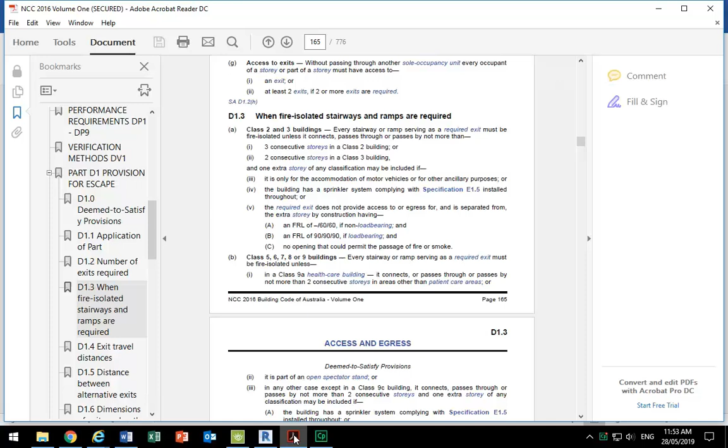So here I've just opened the BCA, and I'm sure you'd all know where you should be starting, but I'll just point out it's Volume 1, not Volume 2. That's the first thing you need to be aware of with the BCA or NCC. You can call it either, but it's probably a good habit to get into calling it the NCC rather than the BCA, even though technically both are okay, because you'll see at the bottom of every page it still does say Building Code of Australia, but it also says NCC, and technically NCC is volumes 1, 2 and 3. The Building Code of Australia is only volumes 1 and 2.

But also you get some building inspector and project manager type people who these days don't even know what you mean, or will say that you're wrong if you say BCA. It's just one of those things. So go with NCC if you've got a choice, but if you've got old documents that still say BCA, it's referring to the same thing. So then you need to make sure that it's Volume 1, because Volume 1 is for classes 2 to 9. Volume 2 is classes 1 and 10.

So both of the volumes have the class information. Class 1 is detached residential. I'm pretty sure it actually says residential or row houses. Yeah, that's right. And that's usually what I check, and I go, oh, wrong one. But it's easy. Once you know those two classes, 1 and 10, which is essentially residential and car parks or garages associated with residential, you know that if you're doing that sort of work, you look at Volume 2, otherwise everything else is Volume 1.

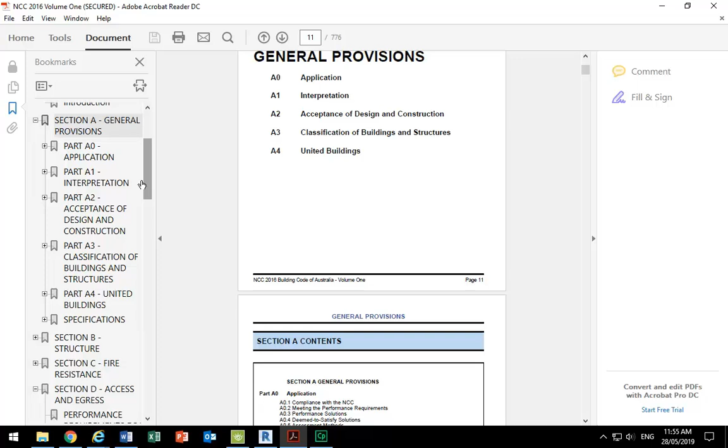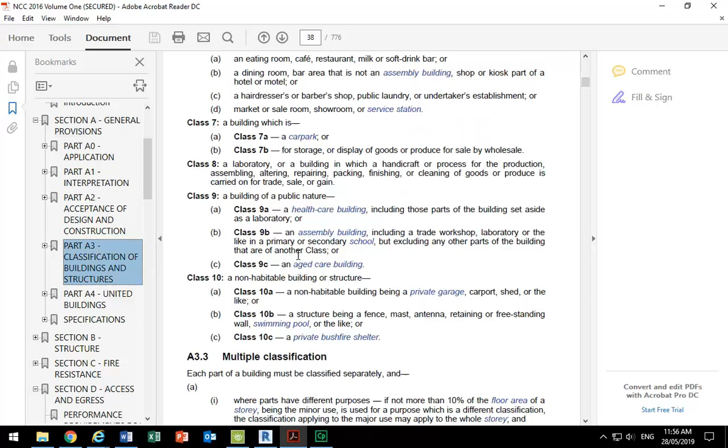Normally where you start is by confirming the classification, and it's got this section in Volumes 1 and 2. Here it's Part A3, where you've got your classes, which I'm sure you all know off by heart now anyway. But I still sometimes look it up. Class 7's car park, I do that all the time. But Class 8 is one that I don't do very often. I've done one. That's laboratories and buildings like that. And then Class 9s, you've got a few different variations. And yours can be classed as Class 9B, believe it or not. Assembly buildings. Sometimes bars are classed as that, especially if they're for public entertainment. So that's one to look out for.

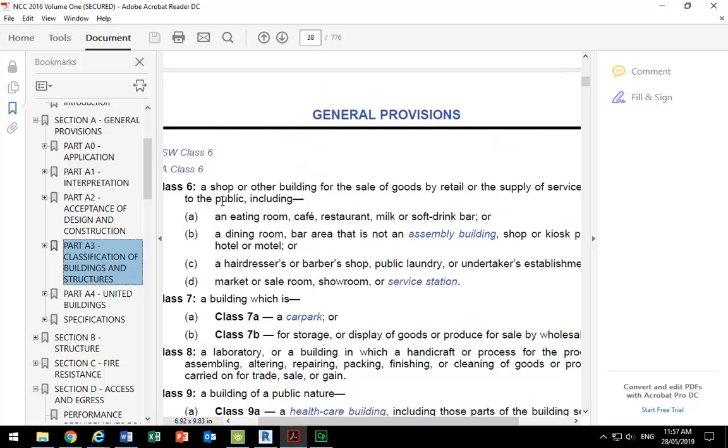Elise, does that answer your question? If it's classed as an assembly building, sometimes you can have multiple classifications. But it's probably better, just for the exercise, to keep it simple and make it Class 6, which is most retail. So that'd be multiple classifications, but is it the retail part you're looking at? Is it a public building? What's it being used for? Yeah, so probably you will have 9B. And that's important because it makes a big difference to the number of exits.

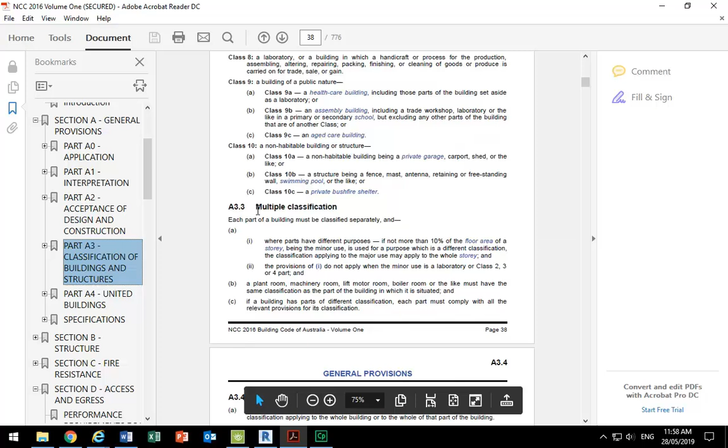You can tell most pubs, if they have entertainment, you might need to add exits, but that's easy because if it's carriage works or tram sheds, one of those sorts of buildings, it's easy to have lots of exits on street level in those big openings they've got, and you just make sure that they're not all windows; that some of them are still exits. So here, you can see again, probably most of it still will be Class 6. And you can have multiple classification as well. But we'll keep it simple and keep it as Class 6, so that answers the first question there.

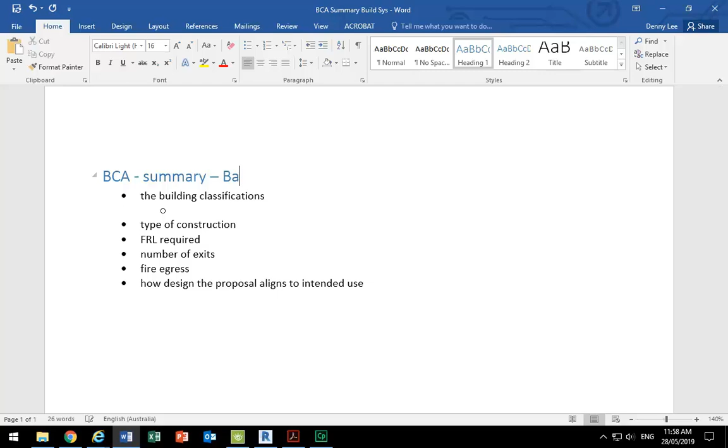Building classification, so I'm just going to put a note here: this is the building summary for Town Hall Hotel, and we're going to ignore the entertainment aspect, which would make it 9B. Oh, you're doing Barangaroo, sorry. Okay, so let's do that. That's fine. Barangaroo, so that's easier. We don't have to do this stuff, though. Oh, we don't? Okay, so we'll do Barangaroo. So that's even easier because...

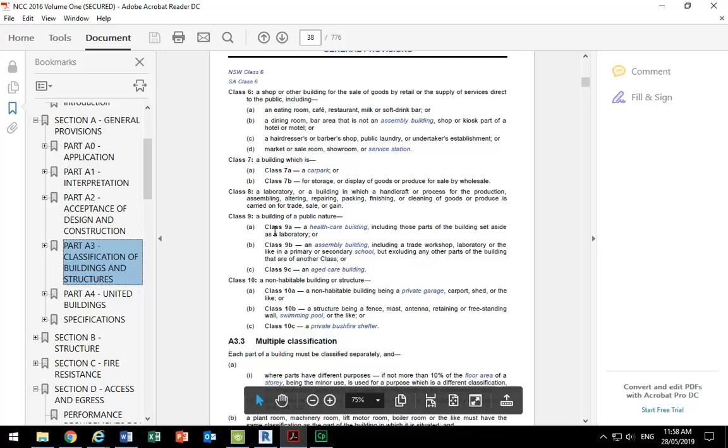Yeah, because then there's only one class. Yeah. I thought he was doing this. Yep, that's even easier. And it's still Class 6. So, much simpler. So it still could be 9B. Well, so what I'm saying, class 5, office building. You're not doing retail in Barangaroo, are you? Yeah, so class 5. Okay, so there we are.

No, but we're not doing Barangaroo. We are, we're doing Barangaroo. Yes, yes. So we've been doing the shopping part of that building on the lower levels as well, where of course it will be class 6. But yeah, so you're doing the office part, which is class 5. And then, okay, so then type of construction is the next thing.

And I'll give you a handout that, believe it or not, Kylie did. You've had Kylie, haven't you? She did a really good, 'cause I know she gets a hard time sometimes about the level of detail she does, but she did a really good rundown on the workflow, or some steps you can follow through to check all of these things. So I'll give that to you later. It's a really good PowerPoint that she did. So you'll see this process that I'm going to follow is what she's outlined there.

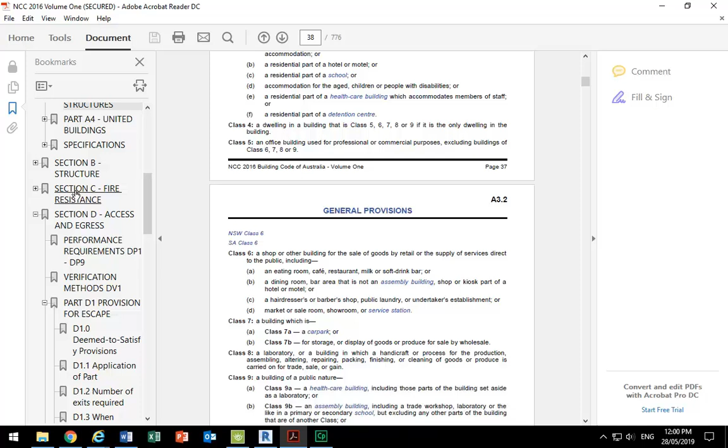So looking at the types. So do you know what this is? The type of construction? Oh, no, there's only one answer to this one in the BCA. No. It's a BCA thing. So if you've done it once, you'll know exactly what it is. So it's in here, section C, I'm pretty sure is where you find it, from memory. And if we go down there, there we are. So this is the type of construction required. It's A, B or C.

So, yes, absolutely. When it's a tall building like this, you don't really need to think too much about it because it's nearly always going to be A. Especially at this height, in fact, it would pretty much always be A. Yes, I'm recording it. So that's the most fire-resisting type of construction. And so we'll put that in. So type A. Okay, so then, this is where it gets interesting. FRL required.

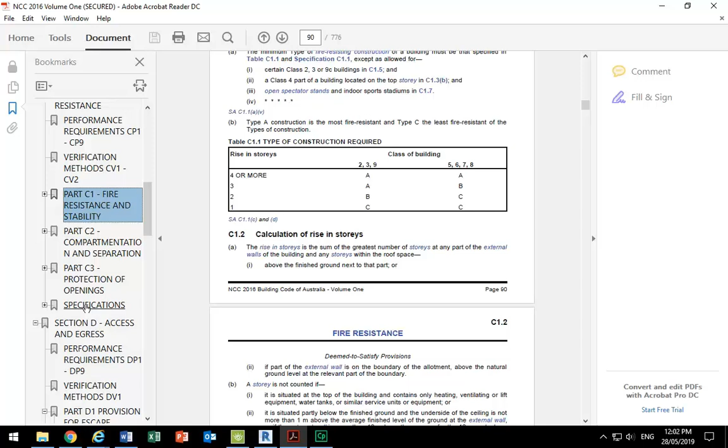And the reason it's kind of interesting, but worth spending a bit of time on, is that it's not the easiest thing to find in the BCA, especially this one, the way it's structured. And notice I'm still looking at NCC 2016, even though technically 2019 is now in force. I've got a copy of NCC 2019 you can have a look at, but we'll start using that later on. So for now, I think you can stick with 2016 and just start to look at 2019. And it is mostly the fire things that have changed in the new one. So that's partly the reason I don't want to look at it, because we'd have to do things a little bit differently. So it's in specifications, you'll then find the fire-resisting construction requirements.

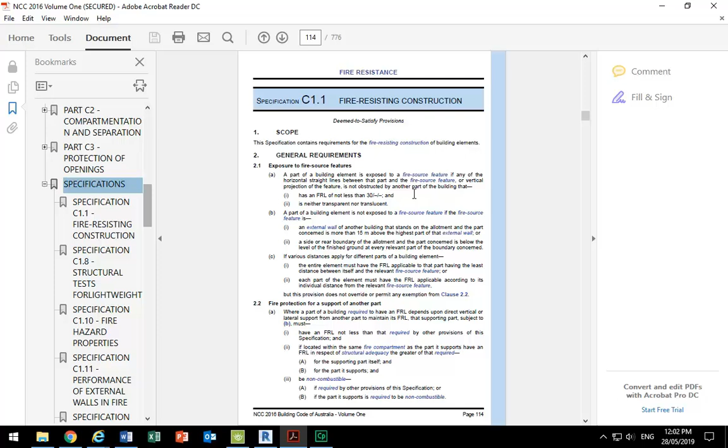And it's not categorised quite as well as the other parts are. Most of the other sections, once you're familiar with them, you can navigate through the bookmarks on the left here, and it's essentially like a table of contents. But when you get to the specifications, it's not organised quite as well. And I found it's easier just to scroll through to find the tables that have the requirements for the FRLs. And here we are. So there's the first table, which is for type A construction, and that gives you the FRLs. You need to find which of these things are relevant, and then you can just copy those across.

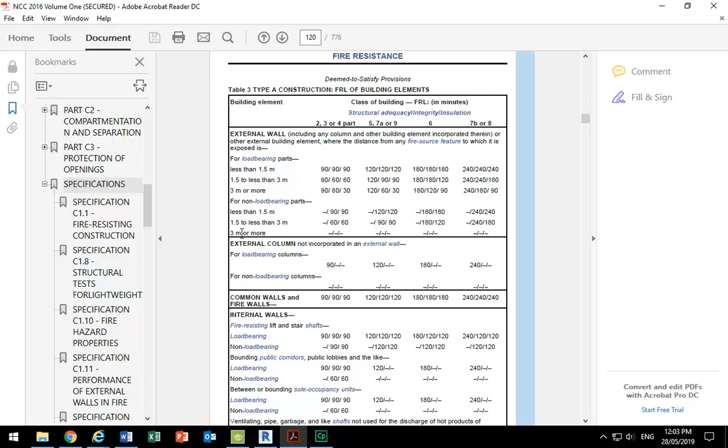So, well, yeah, you'll have, I suppose, the things you're changing. Yeah. Isn't everything pretty much 3 metres or more because the tower is not like... That's external walls, but then internal walls. Yeah, they're just external walls. So, yeah.

Yeah, but then you will have some that are bounding your fire compartments. So, sole occupancy units. You'll have a tenancy; that's the unit, but then that can be broken up into different compartments technically as well. So are all of ours non-load bearing? Not necessarily, no.

We've got columns all through. Yeah, but you're not changing anything to do with the existing structure. But you might be proposing new structural elements that would be load bearing, or even walls that go up across two stories, possibly. If it's just an internal partition, then it's not load bearing, and you could say that. So non-load bearing, you can see it basically has that first one, which is structural adequacy.

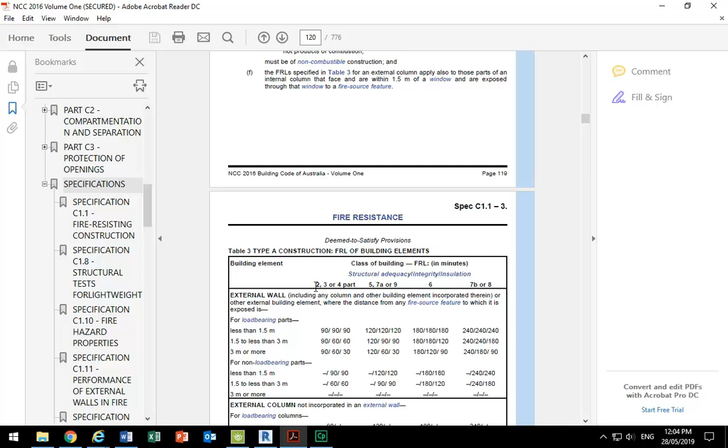I've always got to go and look this up. So you've got the voids. I don't think so. But essentially, I think you could say that it's basically going to be non-load bearing if it's an internal partition that you're putting inside that existing structure.

So what is it? Integrity, insulation, and structural. I always have to look these up. I don't memorise them for some stupid reason, but you don't really need to remember them because you just look this up in the specifications for the type of wall, which we'll get to in a second. John might know these off the top of his head.

What are the three numbers? It's structure, insulation, and integrity, or something, isn't it? It's actually written as structural adequacy, integrity, and insulation's the last one. That's it. So structural, integrity, insulation. Well, you want to have an idea, but you'll see when you look up the specifications. Their time, yeah. So FRL in minutes.

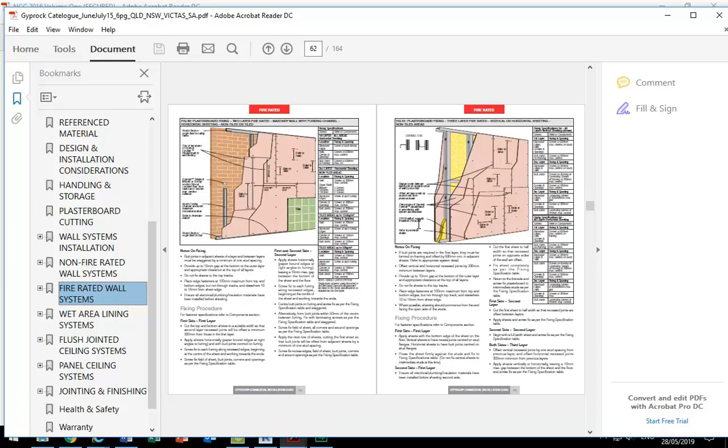And so the way you'll test to see that your walls have the right requirements is you look up a manufacturer's catalogue, essentially, and that will give you the fire rating for the sorts of walls that you're proposing. So here, the catalogue has different wall types. If we go for the fire rated wall systems, it will give you the FRLs. Have a look at these. I'm just trying to find one that gives you an FRL.

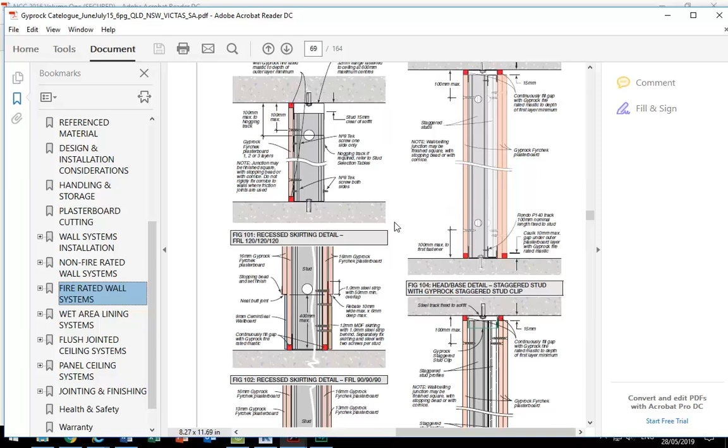And John, would you like diagrams? Yes, you want a diagram of it? Of the types of wall, on the fire rated wall? Nah, please say no. What? He said no. No, please no.

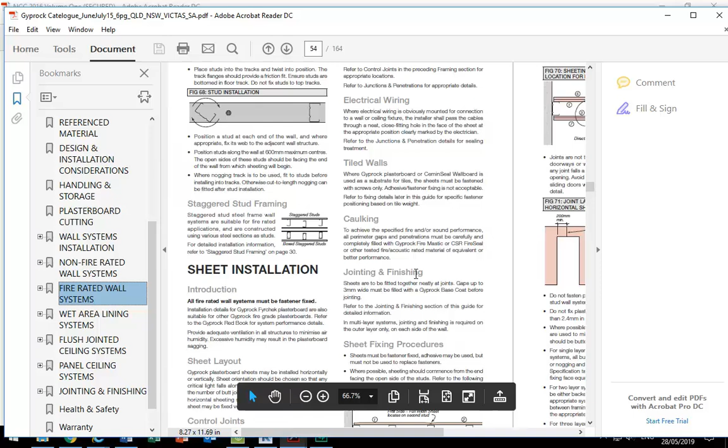Right, so for internal non-load bearing wall it's 120, 120, 120. Yeah, that's if it's... you've got to check the location of it as well. So it's between or bounding sole occupancy units. If it's purely internal, it'll have different requirements. Essentially, if they're purely internal, they're not required to be fire rated. Right, so then it's dash? Yeah, it'll often just be dash, dash, dash. So if it's purely internal, inside the unit, then it doesn't need to have a fire rating.

So why has it got... Oh, right. So non-load bearing, and even here, between or bounding units... okay. Oh, so that's in a fire resisting shaft. It's in a shaft. I can't read it up here. So essentially, for your class of building, technically, it doesn't need a fire rating.

Normally, I think even if it's not required, you would make it fire rated if it's bounding the unit. That would just be common sense. Even though it says here dash, dash, dash, I think that'd be common practice. And definitely if it's around any sort of fire stair, it's absolutely required. So you're suggesting 120, 120, 120 instead of that? Well, at least 120. But the core is around the fire stairs, so we don't need to touch it. Yeah, we're not doing anything to the fire stairs.

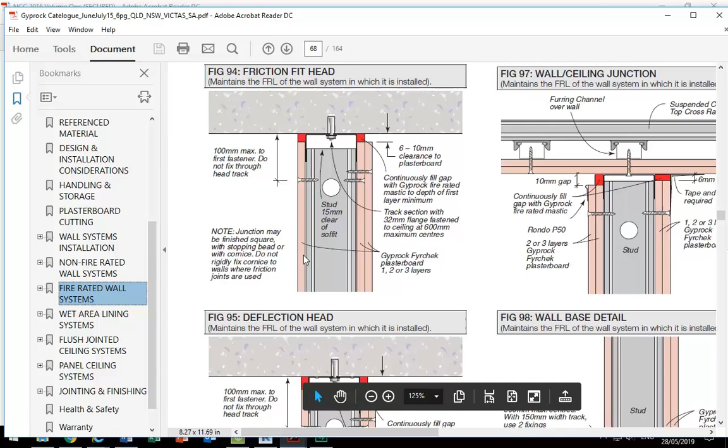I don't think I'll go through the Gyprock catalogue anymore, but you will definitely find the fire rating FRLs for fire rated walls in this catalogue. I just can't see them at the moment, but they are in here. This is a fairly common wall that will give you a certain fire rating, but I'll have to look up where you see the FRLs. I'm surprised I don't give them to you here.

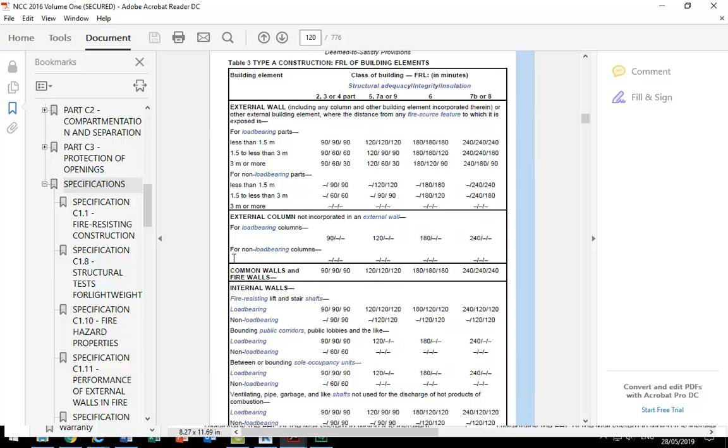So C3.15, that's what we're looking at, I'm pretty sure. Let me go back a bit. Oh, 3.1, that's right, and then 3.15 is the table we're looking at.

Anyhow, this tells you the requirement. The Gyprock catalogue, I thought did list the actual FRL values of these sorts of walls somewhere - I just can't see it right now. But again, that's a fairly standard sort of wall. So Fyrchek is the type of plasterboard that Gyprock make that gives you a fire rating, and sometimes you might need a couple of sheets.

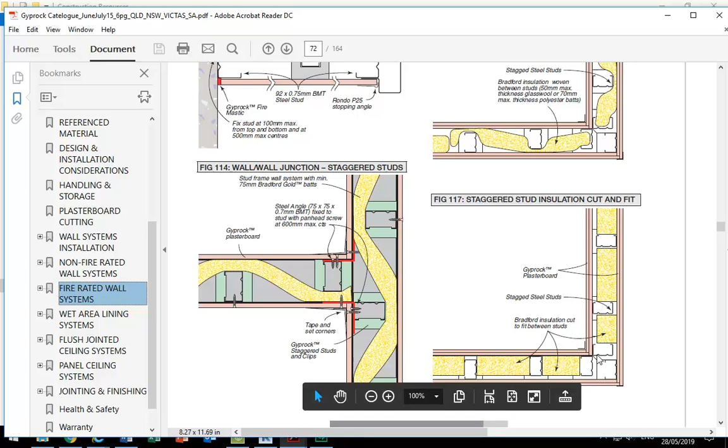Don't know why it's not listing the actual FRL values, but anyhow, you can essentially just say it would have Fyrchek each side normally. I think it has a table where they used all of... yeah, so anyhow, go through the catalogues. Oh, here we are, there it is. So it's telling you here when you put a copper penetration, it has that rating, and there's a table maybe at the beginning somewhere - you've got to go through the whole thing and you'll see it's in there.

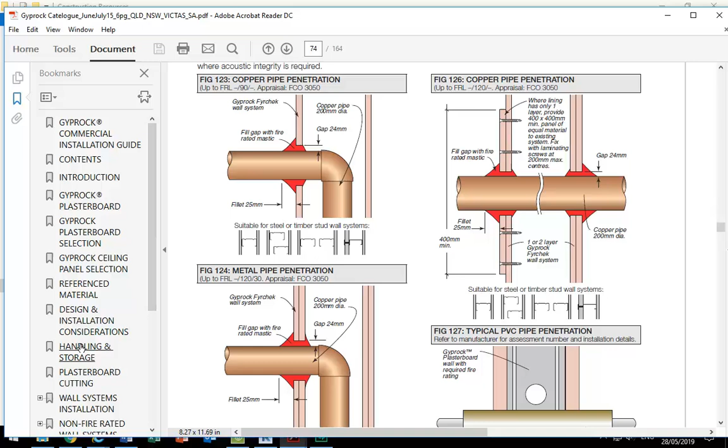Okay, so then going back to, yes, FR required - so I'll say BCA specification 3.15, C3.15, 3.15, and manufacturer's specification.

So Boral have their own specification for their plasterboard and other wall types. Brick walls, you can also look up the fire rating for if you're going to do any different materials and not just plasterboard. And glass is quite hard to fire rate - if you've got glazed partitions, it's quite hard to have them with a fire rating.

But you can. And then also the other thing to realise is that technically you don't need to have a fire rating - I know I've actually done offices where we had frosted glass partitions between tenancies that worked pretty well, but we had to really make sure the fire rating wasn't required.

And I even saw one in, what was it? Oh, Suits, that's right, because I really like the offices in that show, and they did the same thing. So I thought, yep, I was on the right track there.

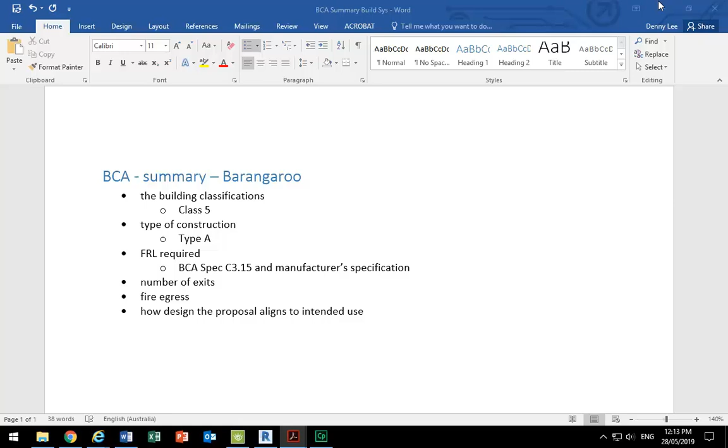So, okay, number of exits - this is where it gets a bit more interesting. Number of exits, that's all section D. This has been section C, and section C is quite technical - if you're not a fire engineer, it can be a difficult thing to read through.

It is, yeah, but it's still not as bad as section B - section B is for structural engineers. You still need a little bit of familiarity with it, but you wouldn't be looking at that all the time. Definitely section C, you need to at least be able to look up the fire rating or the FRLs, but section D is one you really need to be familiar with. So for interior design, section D and probably section F are the two most important sections.

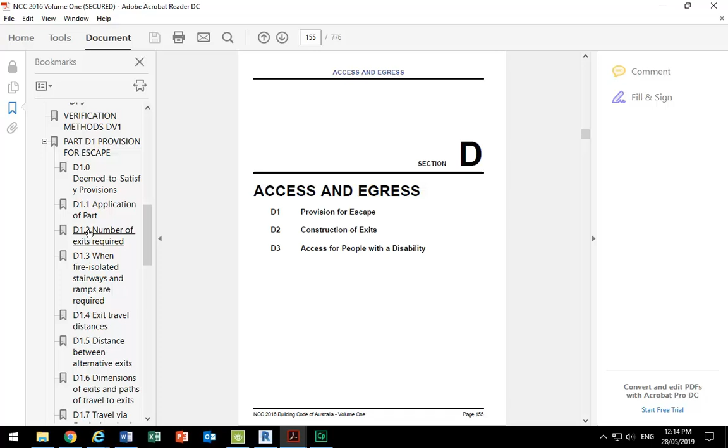So with section D, you basically need to go through the whole thing from beginning to end, but it's much easier to understand, and it's logical. So you start there, number of exits, and you can just base that on the... yep, that's it, 1.2, and then the building classification tells you which clause to look at. So we're 2 to 8, and it's fairly simple.

In addition to any horizontal exits - horizontal exits are basically to the street or outdoor space. Otherwise, it's 2 exits from each story, particularly if it's more than 25 metres, which of course it is, and don't worry about the other thing, that's for class 2 or 3.

With the Town Hall you've got that street level exit at the back of the basement. Technically it's not even really a basement, even though for some things it would be, because there's a thing about how much of the building's under the ground for the calculation of the number of stories. That's counted as a different type of exit to these vertical exits, which are the ones you need to have where you've got the fire stairs.

Is the effective height calculated from the bottom of the first floor? There's a clause about that - you look that up. There's a way of calculating the height, and it's all to do with what's below ground, how much of the building's below ground, and whether you count the story or not, and where you measure the height from. You can look up that clause, but for the Barangaroo, you're well over 25 metres. Whereas Town Hall, you're well under.

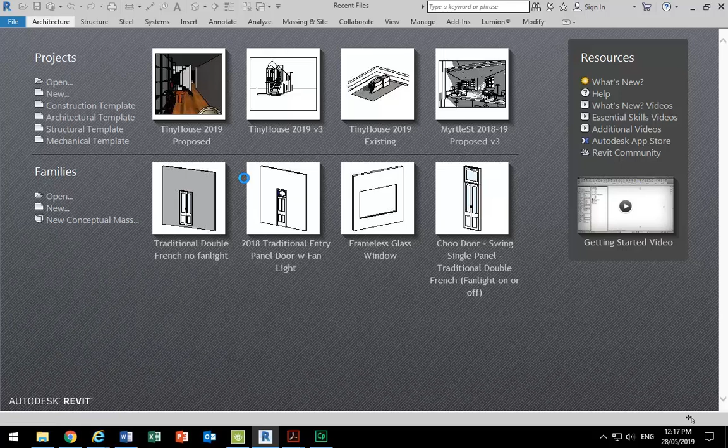It won't affect us much. We haven't touched anything near where... pretty much, yeah. So no one can change the corridor because we can't change that bit.

Yeah, exactly. So okay, if you start to measure some of the distances, using the measure tool, I'm just going to measure from here to - so the fire stairs, are they in this area? I don't even know, really. The fire stairs, I think, behind... are they up here? Where's the fire stairs? Anyone remember? No, I don't know, they never marked them in. They must be in that central bit.

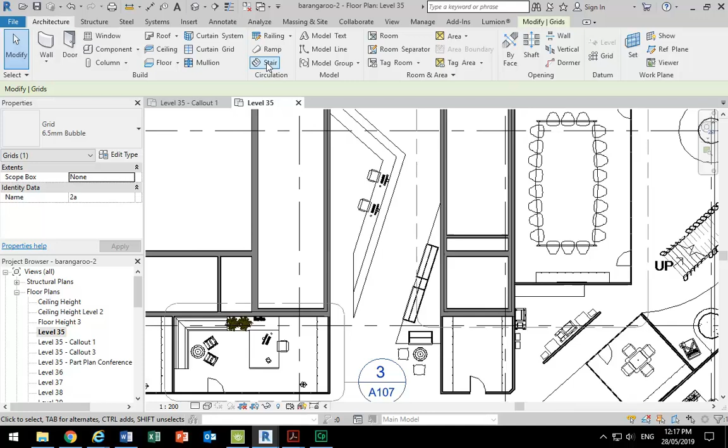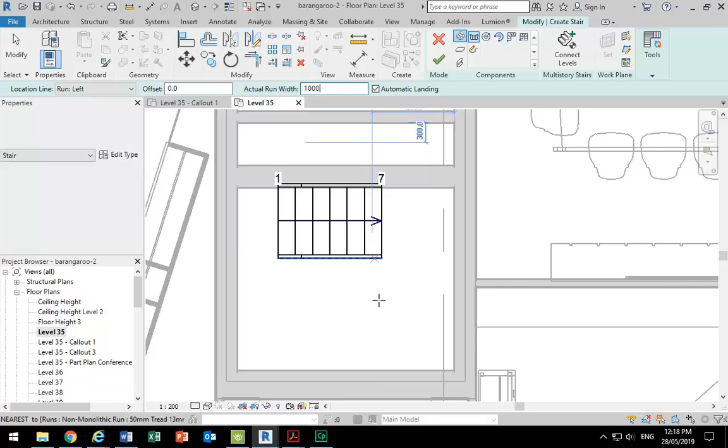All right, so... that'll do. Oh, they're going to this one section there. So, oh yeah, it's just so I know where they are. He's just calculating the distance from there to the furthest point. Yeah, exactly. So I've got a stair there, and then where was the other one? Left next to the toilet, underneath that number 1. Yeah, okay. So, up here. There. Okay, great.

Okay, so then we can do some rough measurements just to get an idea of the travel distances. With the measure tool, with the chain option turned on, you can just say, right, so this might be one of the furthest points from the fire stair. So from there - technically we should be going around the furniture, so I'll just try and measure a path that goes... yeah, it should be, yeah, especially when you've got workstations, they're actually fixed in location anyway. Pretty much, yeah, the workstations, you've got to set them out. So that's, at the moment, that's - let's see if I finish it.

Yeah, it was, yeah, a bit under 60, yep, yep.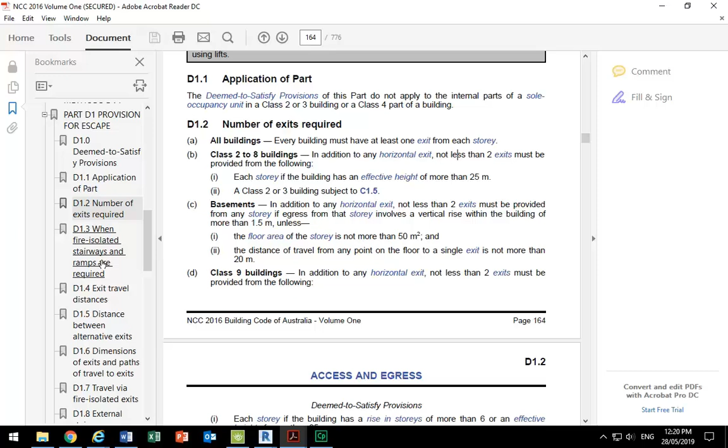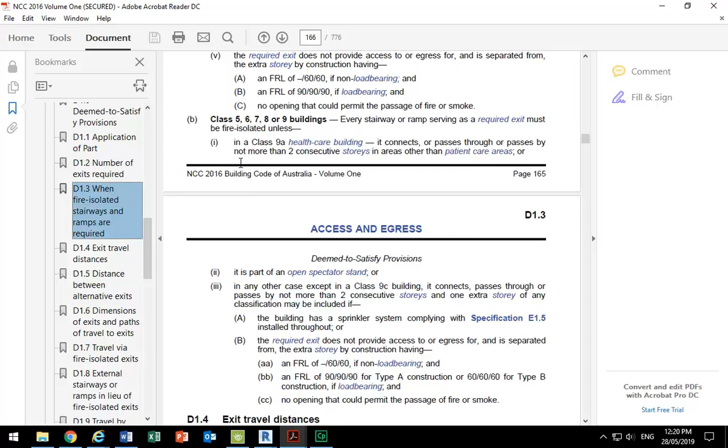And then, okay, so when fire isolated stairs are required, that's D1.3, and essentially if it's this sort of building, class 5, it's always required. So these exceptions are all for class 9, you'll see. And these days, in the past I think it didn't have to be like this, but now pretty much every stair needs to be fire isolated.

So that means it's got to be in a fire resisting shaft. And as John was saying, you may need a fire resisting corridor that forms part of that required exit. What's the wording for that? Fire resisting shaft. Yeah.

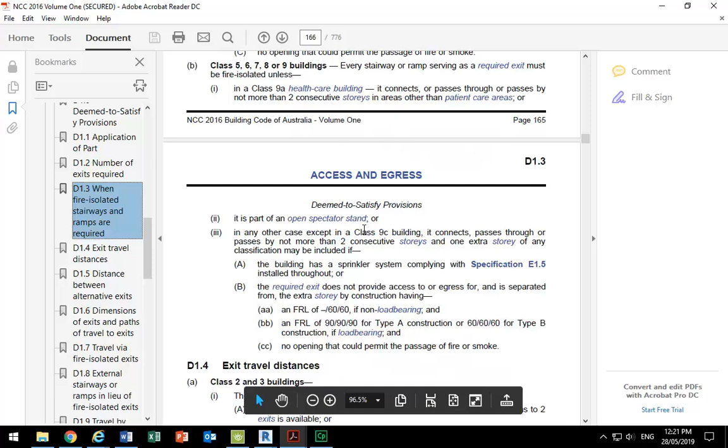So then you move on, we know they've all got to be fire resisting, and then we move on to the travel distances. Remember, these are required exits. Your access stairs are additional. So if you've got internal access stairs, they're additional to the required exits. That makes sense? Yeah, so they're not required exits.

So they're internal access stairs, and there's a little thing that can catch you out with those as well, which is kind of related to this. They can only go a certain number of stories. You can only go, I think it's about 3 or 4 stories, before you need to offset them and have them going from another point.

Yeah, it's because of fire travelling within a compartment. So fire stairs can go all the way through because they're in a shaft, but internal access stairs can't because they don't have a shaft that's fire resisting. It's so that if it starts burning, you wouldn't be able to use all the stairs, and also the fire can't travel through. So if you've got an internal access stair that goes 8 stories, the fire can go all the way through your fire compartment, which you don't want, or through multiple compartments.

Yeah, and something to watch out for. It affects atriums and lots of things. Yeah, I think it's 3 stories. You have to look it up, but it's 3 or 4 stories.

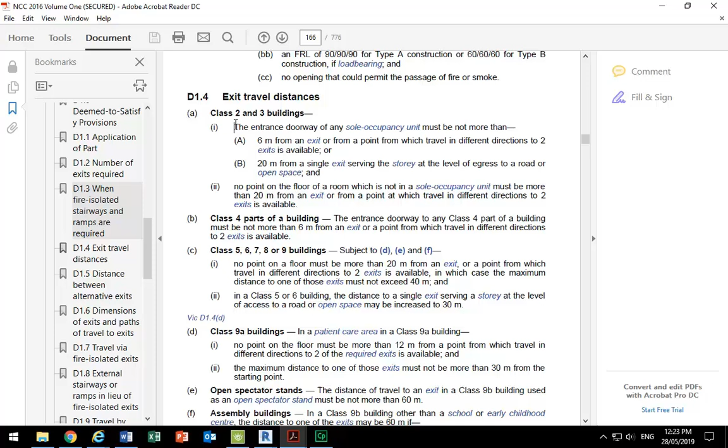So you need... that's 2 and 3, we're not doing that. We're doing 5 to 9. So this is the control that applies.

No point on the floor must be more than 20 metres from an exit, or a point where travel in 2 different directions to 2 exits is available, in which case the maximum distance to one of those exits must not exceed 40 metres. If it's only got 1 exit, which doesn't apply to us anyway, you can increase that distance to 30 metres, but that's also on the level of the access, so that doesn't apply.

So to open space - and open space has a definition you've got to be careful of - but again that doesn't really apply if you're only looking at this upper story. So it's really that first one, it's only that.

So again, 20 metres to an exit or 40 metres to a point where travel in different directions to two exits is available. And I'd be struggling to see how this one does comply unless the door's here. Let's see, so they probably have ignored the furniture, which is an option but not best practice. Measuring directly there, yeah, they're fine. So they could get around the furniture, and that's 30 metres to there.

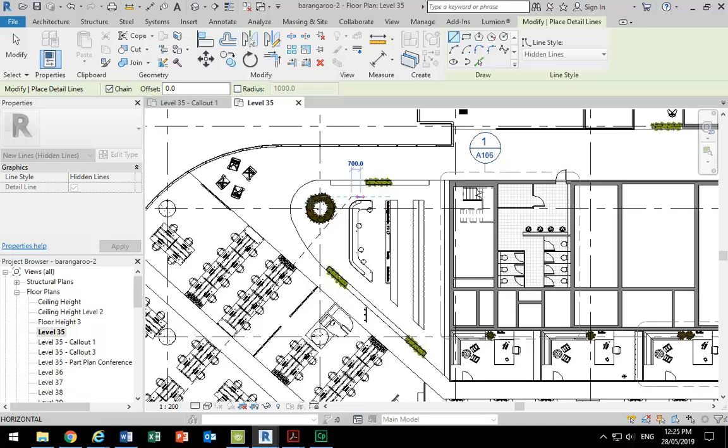So you're saying you can measure your line. Yeah, yeah, so there, that's probably okay as a path. I could maybe just adjust it slightly.

And this is something you use a lot when you're doing your planning. You'll often have to adjust things. And once again, if it doesn't comply, you just have to say it doesn't comply. Well, you should be making it comply. No, but we've already designed it. So if it didn't comply from this report, we just say it doesn't comply. I suppose so. Yeah, that's it.

And so the nice thing about these detail lines is that they give you the length in the properties. So you can see there, this one's 18 metres, the next one is 7 metres, and the next one is, let's say, 8 metres. Can't you select them all and get them added together? I don't think so. You can schedule that and do it that way.

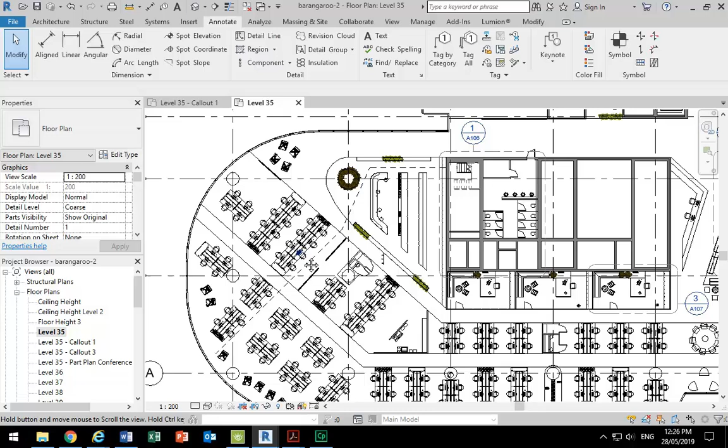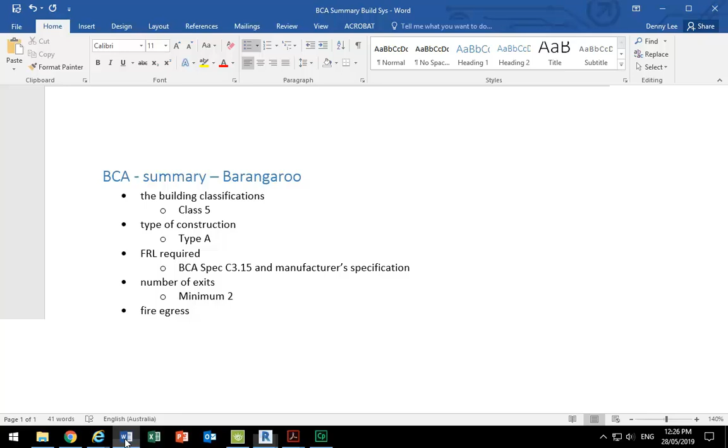So fire egress. Again, the most important thing is that you put in the requirement, and you could probably just copy that clause from the BCA, because that applies exactly.

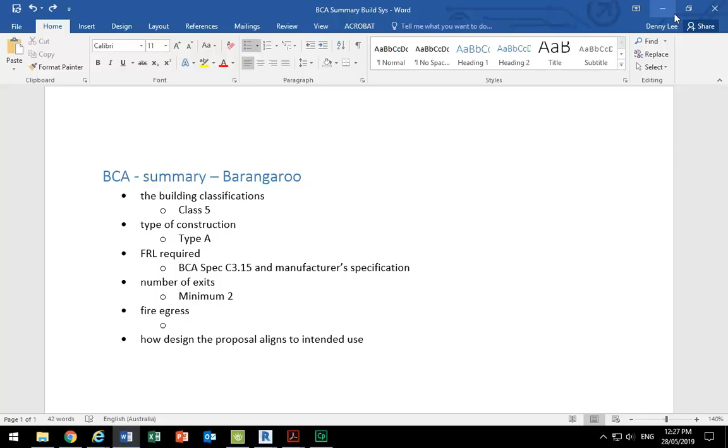Oops, didn't I just copy text? Let's do that again. Okay, it's getting some weird characters. That's better. Oh, it's getting confused. Copy. Okay, it doesn't want to copy from the BCA. I don't want to sit down and type that up. That's really frustrating. That clause could just be copied across if I can get it. Clause C1. Oh, here we go. Now it wants to do it. There we go. That's wicked.

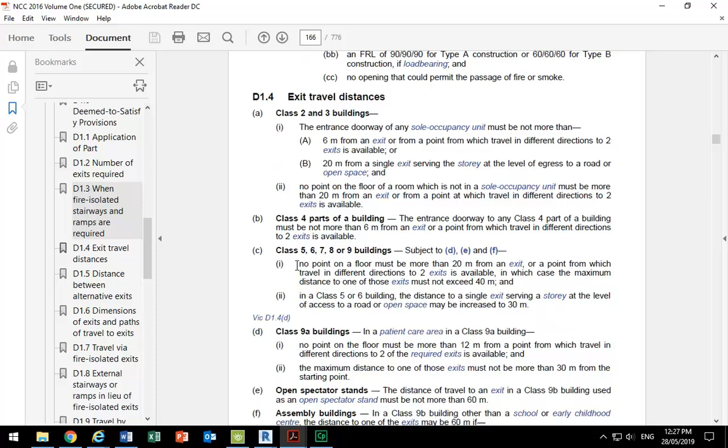And that's fire egress, yeah? That's the first part. So we've got to check those and see what other things apply. That's definitely the most important thing, exit travel distances, and that clause is probably the most important. But then you've got to go through and check the other things and make sure they comply. So the distance between exits matters, because here that's the control we're using. We have more than one exit, and we're looking at that 40 metre requirement.

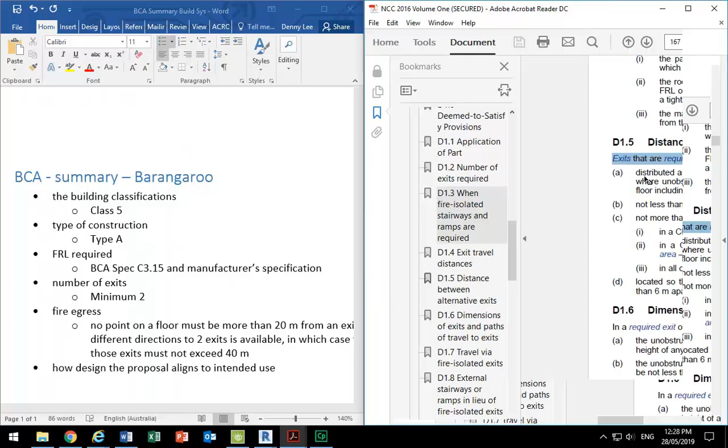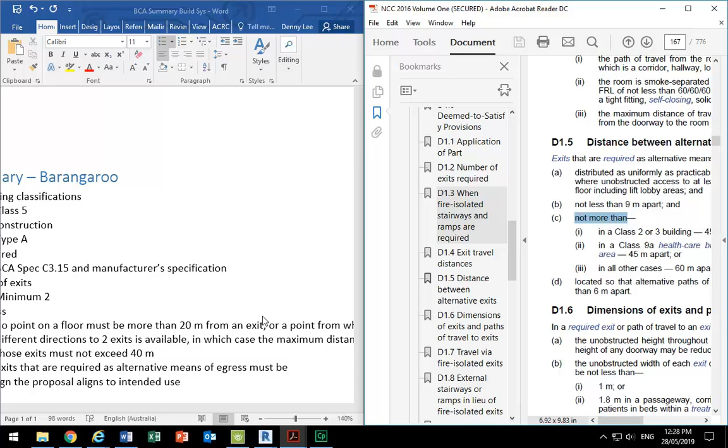So then, again, for you, it's not class 2 or 3, it's not class 9, so it's this one. 60 metres apart. There's nothing wrong sometimes with just copying the wording from here and making it make sense. You don't want to just copy whole blocks of text and not make it meaningful. So that's going to make sense if we just say exits are required, must be not more than 60 metres apart.

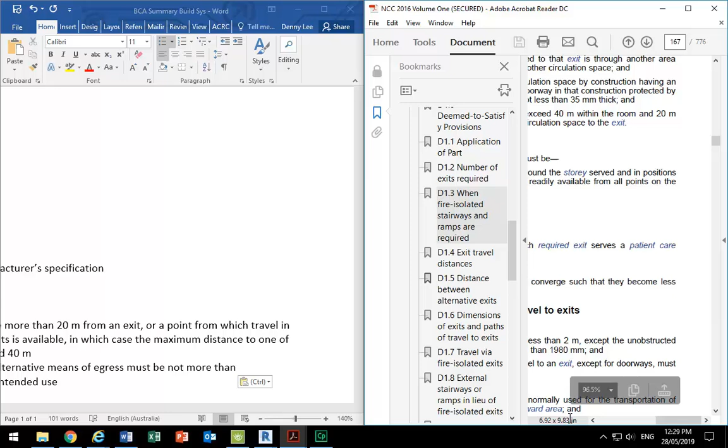There is also a requirement for when they're too close together. Oh, yes, here we go, that's just below that. So we'll get back to that. And it's all pretty logical stuff, really. You don't want them too far apart, of course, but also you don't want them too close together. That kind of defeats the purpose of having different exits.

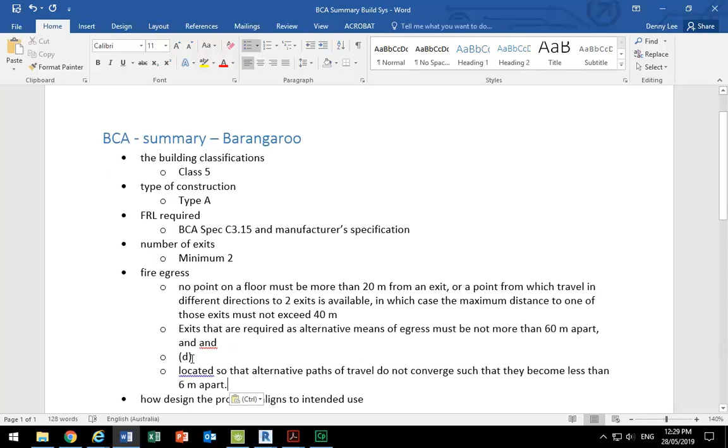So you put an and. And then an extra and. There we go. Okay, so again, just say exactly what the requirements are. Got to keep going through that whole section pretty much. And you'll learn things about how to design buildings like this by reading this section.

I'm amazed by people I've worked with, even some pretty senior architects, who have obviously never read through this whole section and don't understand basic things like how external stairways need to work. But all the good architects I've worked with have read through this multiple times and are across it all. And don't do what the bad ones did, who tried to get some external stairs built that wouldn't comply.

Or actually the worst one, she put a huge window, a 10-storey window, in a fire stair. And it tells you pretty clearly here that's not allowed. But it took the builders checking it all and doing the pricing to tell everyone that was not okay.

Anyway, so you can do fire-rated glass blocks. Yeah, fire-rated glass is a bit trickier, and also there are requirements for openings in a fire stair. Oh, yeah, not opening windows. Yeah, well, even fixed windows. There are requirements for openings, how far they can be from other openings and things like that.

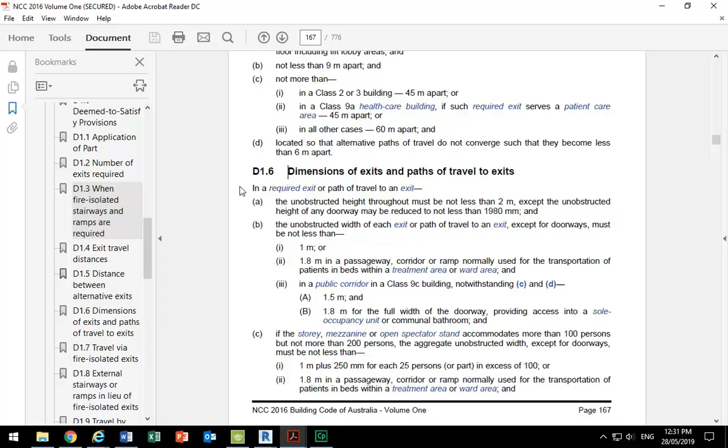And also it gets you thinking about the things that aren't made clear in here, like accessible egress, because we can't say disabled anymore, even though they do still say disabled. So people in wheelchairs generally, and I know plenty of guys in wheelchairs, and they're quite happy to say it's disabled. The requirements in here aren't all that clear, but you should allow room for them to be safe in the fire-resisting shaft as well.

Yes. And John's been through that. We just have to park them in the... Yeah, there has to be space to park them in the shaft. That's it, exactly. So this probably wouldn't be big enough, but you could check that. So again, you just need to say in the report what the requirements are.

So the other thing, though, is the width. Generally, it's a metre, except for the doorways, of course. The doorways have their own requirement. But otherwise, it's a metre. And it doesn't say it here, but I know it's a metre between handrails throughout the whole path of the exit. And so that's really important. So both A and B are applicable?

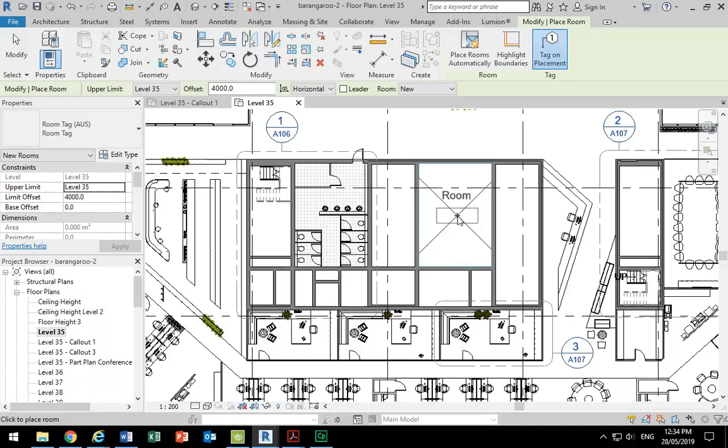The reason I don't like using rooms is because they automatically calculate rooms. You can put your own dividers and things like that in, but it's a lot of extra work. So you can get a room here, and then you can put the option into the tag to show the area, which is there. And you think, great, it's telling me the area, why don't I just use that for everything? Well, the problem is, it's calculating where the edge of the room is, based on these rules that you've got to set up.

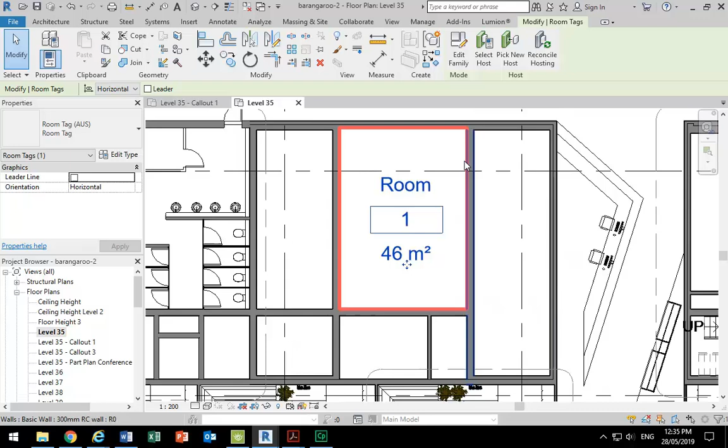And when you're looking at things like the accommodation of a level, and also even just calculating things like floor space and then lettable area, you want to set the boundaries of those spaces yourself. So you want to be able to draw where the area's edges are without letting Revit decide. Can you show us how that works?

So yeah, sure. So with the area tool, it's my favourite thing for my own designs, because you'll always have to give floor space ratios and other areas as well whenever you submit an application. So areas are really important, and then for this as well, fire egress. So when you go to click on the area option, you have to make an area plan. Then you choose the level, so I'm on level 35, so I'll choose that level.

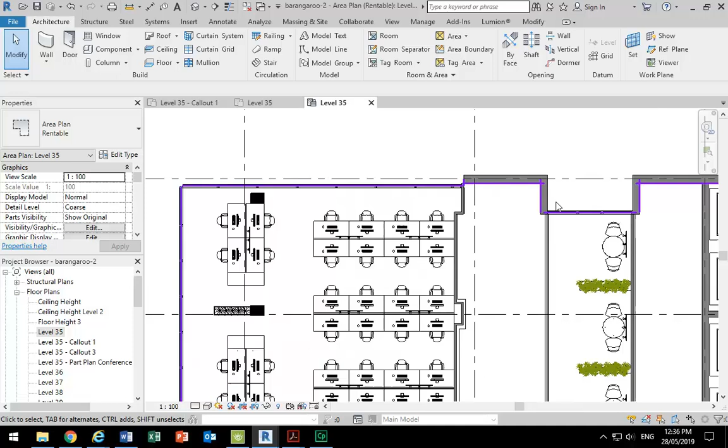And you get the option to automatically create boundary lines. It's hit and miss. Sometimes it works, sometimes it doesn't. So I'll say yes, and we'll see what it does. If it doesn't, you can say no, and then just draw the boundaries yourself. But here, it's done a pretty good job. So you can see there, it's traced around the whole outside. We at least had curtain walls, so that's... Oh, no, well, the outer edge is all it will do for you, and then the rest you've got to do yourself. So then you've got this area boundary option.

But firstly, I want to show you, it's made a new kind of view. Now, I left it on rentable, and that's okay. But the other option is gross building. So that's great, because it means it doesn't mess up the original floor plan. It doesn't affect it at all. So if we go down here and look at area plans, it then has all the options there to show areas and to then even have some nice graphics and things.

So, can you take things out within that aren't? Oh yeah, you can hide them. You don't want to delete them because that deletes it from the other one. But you can definitely hide. And that you can exclude certain things from the area? Oh yes, of course. So maybe we don't want to see furniture. So I'll just hide those. Oh no, I don't mean that. I mean exclude it from the... Oh yes, of course. Oh yeah, I'm going to show you that.

Yeah, absolutely. So I'll hide the furniture just so it doesn't get in the way, and then this as well. The lighting, we definitely don't need that. So that's a bit cleaner. Even the grids maybe are going to get in the way. Yeah, much cleaner. Okay, so then to draw in boundaries, you can just use that area boundary tool under area. So notice how until you make an area plan, it doesn't give you the option to make an area. I'll make an area in a second, but you can only make these things on an area plan.

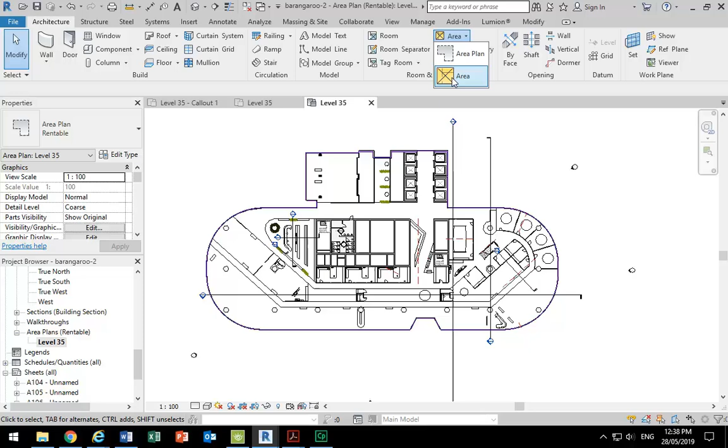So the other thing is area boundaries, and so maybe I'll just go around, and notice it's got this option, apply area rules. Often I'll just turn that off, so then I can just draw where I want. Otherwise it'll try and make the line go inside the wall following these rules that are set up. But if I turn that off, I can just draw anywhere. So I'll draw over this core. We're going to say we'll exclude that from our accommodation calculations. And here as well.

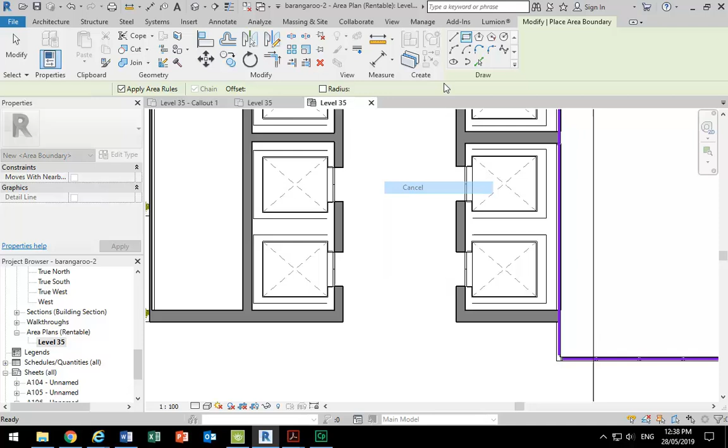Exactly. And even the bathrooms can be excluded. So, yeah, so that's... sorry? Yeah, lifts too. That's right. So I'm just going to draw some lines. And it's nicer than lots of the other things in Revit where you've got to join the lines perfectly to make closed shapes; here you can see they're not quite touching, but it'll still work.

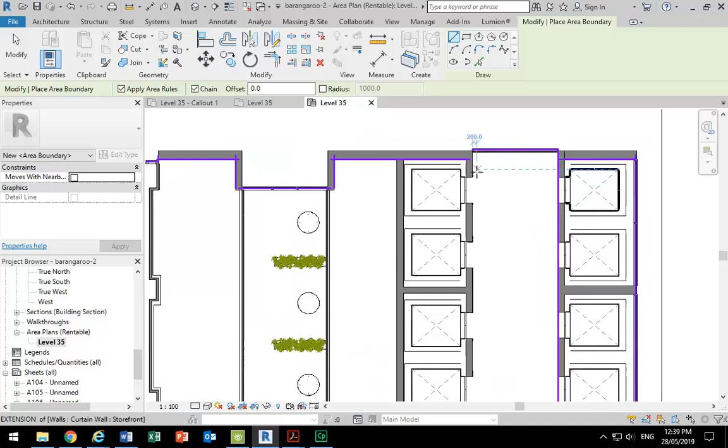So it's a really nice tool in Revit, and one that's probably underused. But people who use it for a living use it all the time, because you have to do floor space calculations and site area calculations and all these other things for every project, and that's why they've got the tool there. And yeah, the people who use rooms, you know they're students.

So then, I've got enough there to then start doing some areas. And so under the area option, you can choose area. I'm just going to click and notice how it's going with that cross there and showing you where it's stopping. So where I've drawn the boundaries, that's where it stops. So I'll just place it down there. And that gives me basically the whole level that I want. I'll show you in a second how you can divide this up into different areas.

But then to see this a bit better, I'm going to put on a colour scheme. So on the Annotate tab, you've got Colour Fill Legend. And let's put this to the side. And I'll just leave the defaults, and it's going to then fill that in, and it makes it much clearer then where the area is that I'm using.

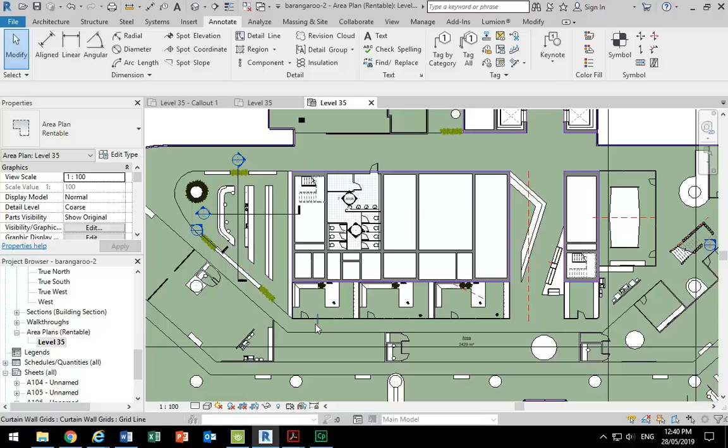And we can break that up further. So if we want to have these, just an example, these meeting rooms broken up. So we'll draw an area boundary around those. And again, they don't need to be perfectly closed or any of that stuff you've got to do with the 3D things. So now they're excluded. And I can even break them up into different spaces just by drawing a boundary between them.

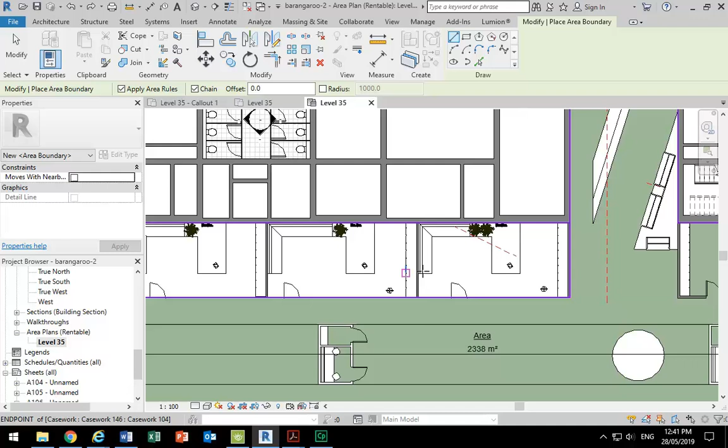Yeah, absolutely. In fact, I won't divide them. I'm going to leave them as one big space since they're next to each other. Yeah, this is great for interiors, this whole area tool with colour schemes. And so I'll go back and put a new area in just for the meeting rooms. So at the moment they're the same type. They're both called area.

Well, I'll start just by changing one of the names. So I'm going to select one of these areas, and we'll call that meeting rooms. And then we'll call the other one just office. Okay, so at the moment they're the same colour. So then we can select the legend and go to Edit Scheme. Change that colour option to name. I'm just going to say OK.

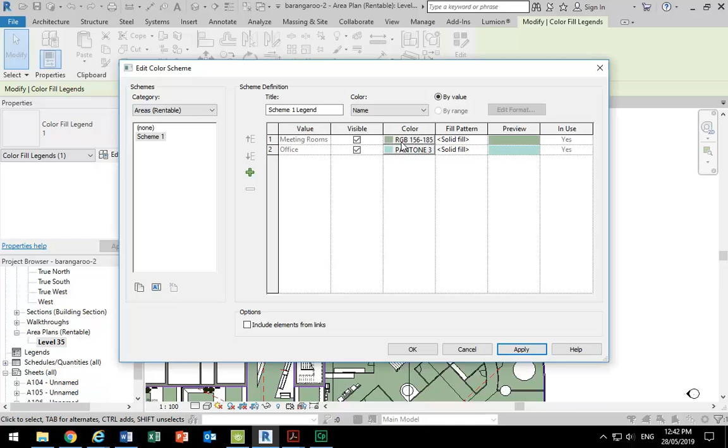And then I'm leaving it on the automatic colours, so it uses the Pantone colours. You can change them, and you've got the full Pantone library in there for some nice colours. Yeah, Pantone is a great colour system. And there we are. So, two different colours, and they correspond to what's in the legend.

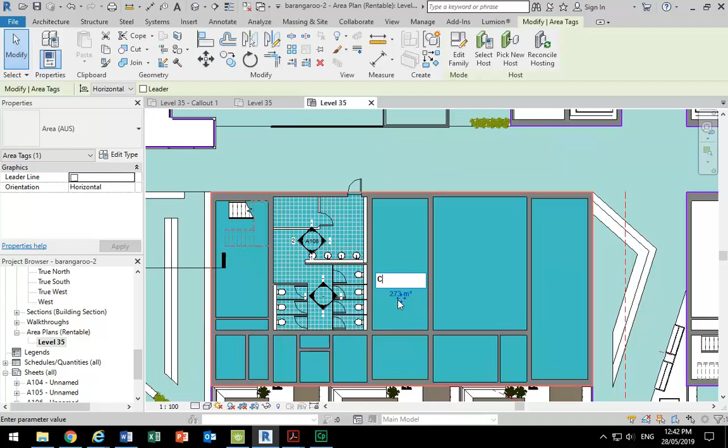And so then if I do a new one, let's say we want to do the bathrooms, then that could be another area. It's already defined, so I can just place that in there. So we might call that amenities or core or something like that. And then it gets its own colour, and that just comes up on the legend automatically.

Now, is John still wanting to do something at 4:30? Oh, right, okay, yes, so I'll finish up in a sec. Yep.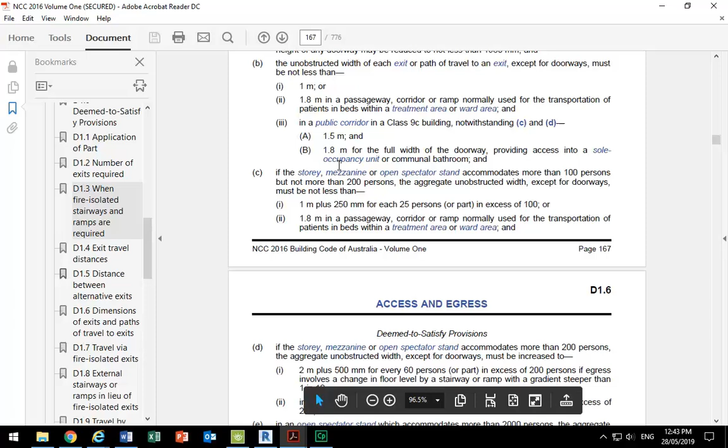So that should give you enough to work out the amount of accommodation, and you need to look at that to see if you need to have wider exits. So maybe we'll finish up there. I highly recommend just reading through the rest of section D, especially D1. Then D2 tells you about construction of exits, which you probably should have a bit of a look at, but it's probably not as important, even though you will need to look at that later for things like your stairs, and requirements for stairs generally are in section D2.

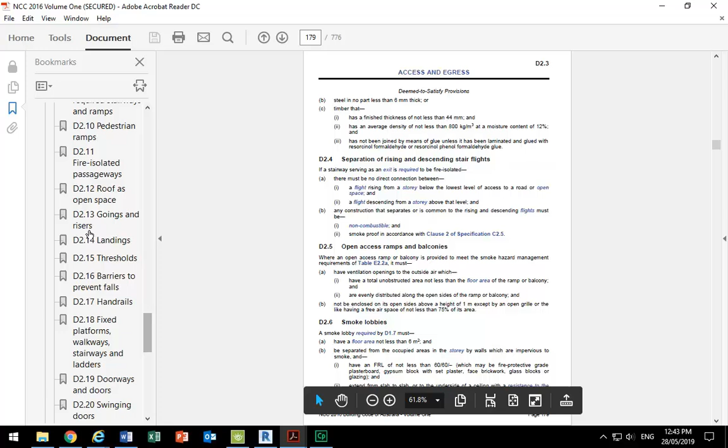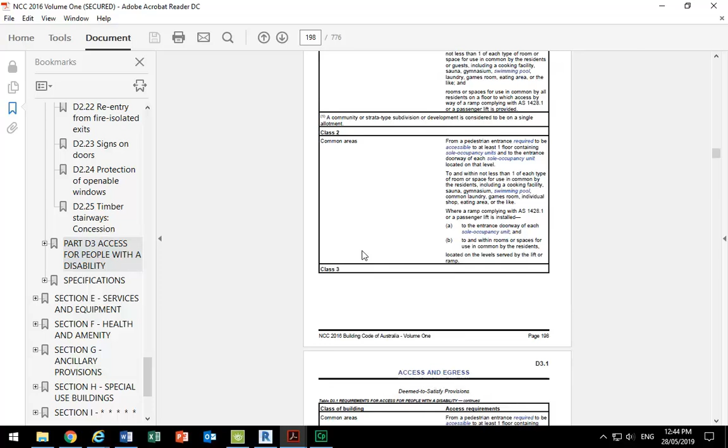So here, goings and risers, all those basic requirements are in there. We've been looking for those. And then, here we go, access for people with disability. See, they still do say disability. And then, well, that's not going to be required here, so you've got a lift and that's all you need there.

So then, we can just quickly have a look at section F, because even if you aren't doing the detailed requirements from section F, which is where you get the number of bathrooms required and things like that, and lots of other things as well, light and ventilation, really important, room heights, but calculation of numbers of people occupying your spaces, I think it's actually back in section D, but there's a link to it here. And I've always got to start here, because that's just the way I do it.

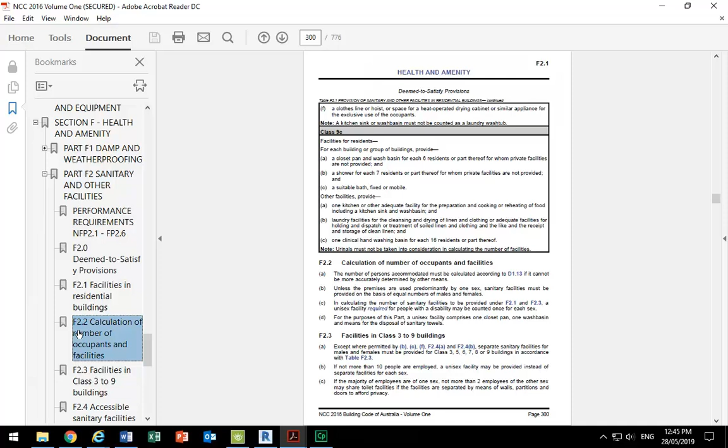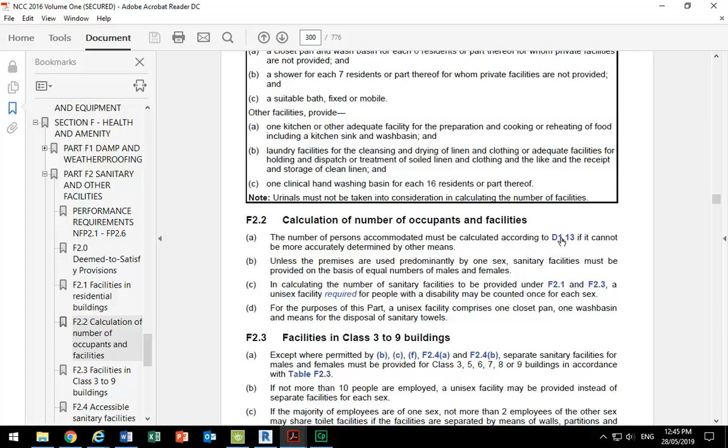So here you can see it tells you in section F2.2 that you need to calculate the number of occupants. And then it's got a link that takes you back to section D, where it has a table, I'm fairly sure, that tells you that. Here it is, yeah. Okay, so offices, 10 metres per person is what that means.

So that makes sense. So if you've got, in this case, 2,338 square metres of floor space, office space, you divide that by 10 and round up to get the number of people occupying that space. Right, so 234 people. That's it. So that then tells you, when you go back to section D, you should also have a look at section F, but I don't think you need to do that for your report. So going back to section D,

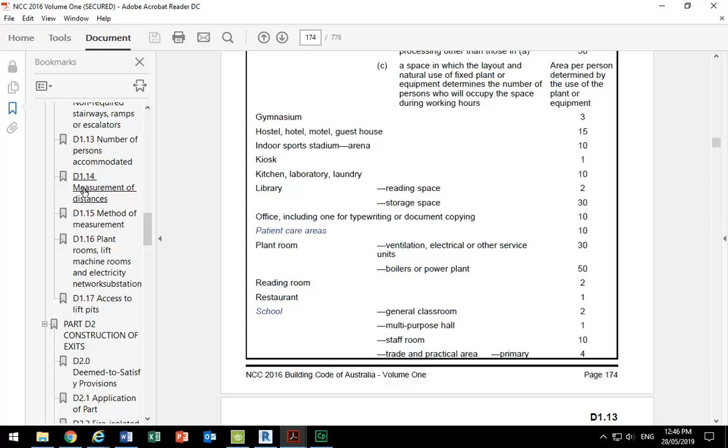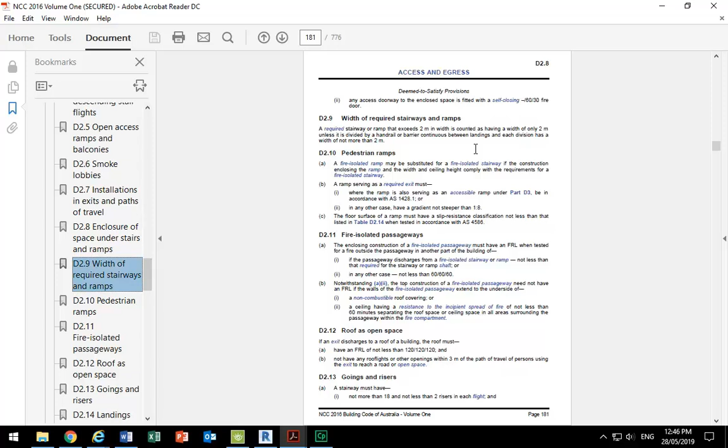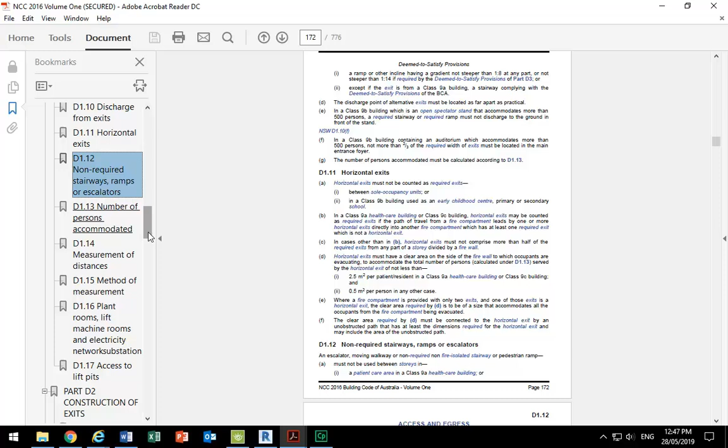where was it? So construction of exits. So we're just there. The width of the exits, which, here we go, width of required stairs. Oh no, that's not it. I just had it. Is that the dimensions? Yeah, so it's D1.6, is it? That was the first bit. Oh yeah, dimensions of exits. Yeah, you're right, spot on. Yeah, that's it. Here we are.

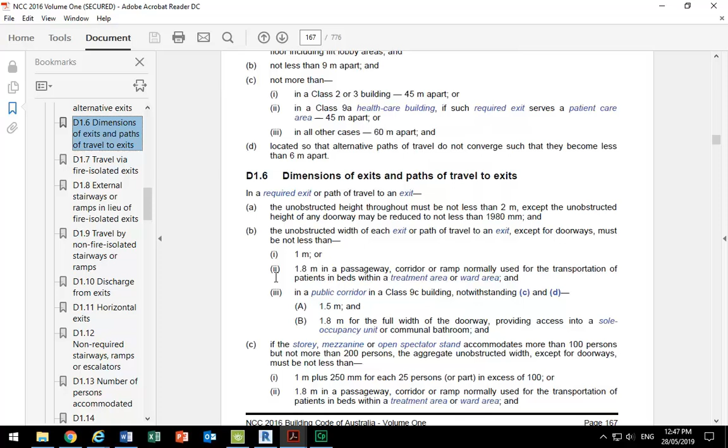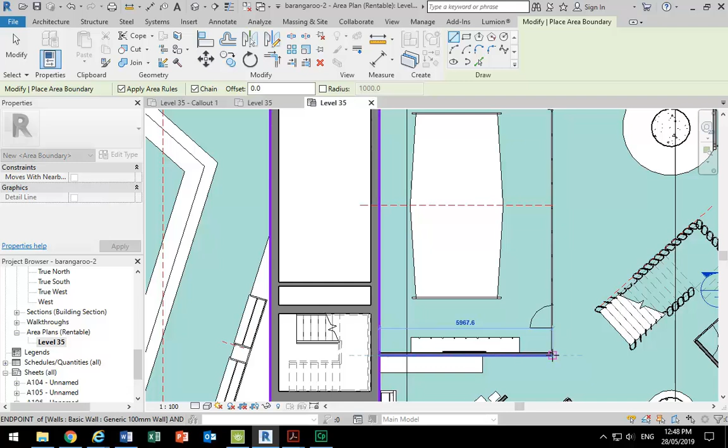Right, the way we would write that was that we give the 2,338 metres square, but then we'd say it is compliant once we minus the non-usable space. That's right. You'd need to show that the usable office space is going to give you less than 200 people, essentially. So here again, I'll just block off that corridor, and that should take it under. So what are we up to now? So that's 183, 184 people. So that complies. And again, they've designed this building already to comply, so really you're just trying to show how they've made it comply.

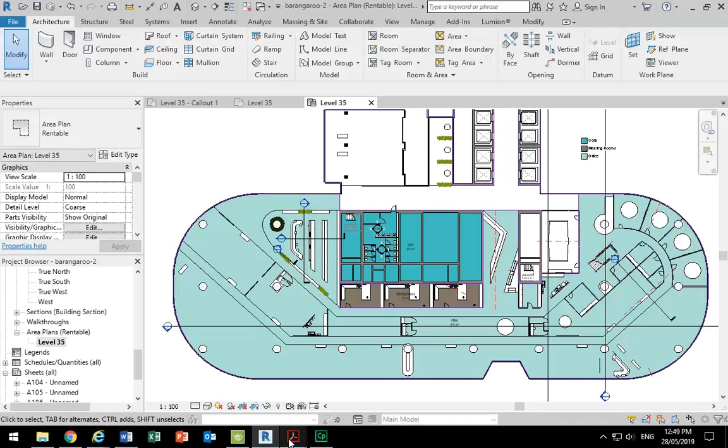Right. But we don't have to put in this diagrammatical evidence, you can just say. I think you should try and say how much office space there is. But we can say it without showing in plan. I think so, yeah, just in words. So that should be enough, and that's probably a good place to stop. Is that everything on that BCA list? Yeah, it is. So John didn't ask for section F, which normally is what we do for a lot of the other projects, but he's been nice and made it a bit less work.

What's the last thing in your list? Health and amenity. Oh, that's just determining how the proposal aligns with the intended use, which is kind of what we've been doing as we go through anyway. Yeah. So that's something we'll have to work out. But there you would put it with the summary. If it wasn't compliant, you'd particularly highlight that. Essentially you'd be saying this building was designed to be an office, and so your design aligns with the intended use. Exactly, that's right.

So that's it, but again, just be aware, for interior design, section F is really important as well, and you should get familiar with that. And that's the way I started to learn to use it, was by focusing on those sections and just reading them cover to cover, all those chapters.

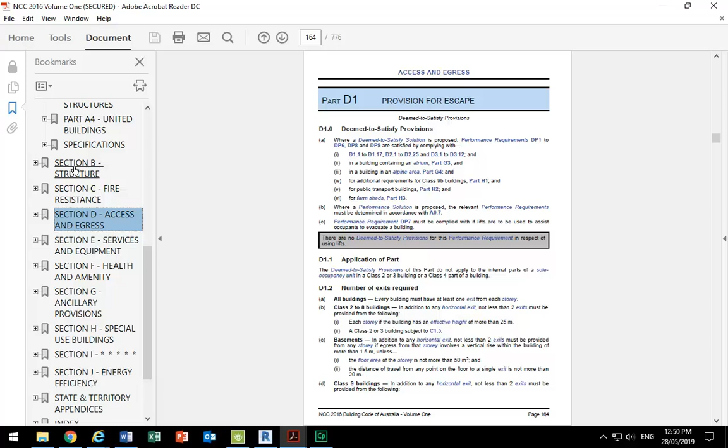So that should do it, I think. But yeah, hopefully that'll make the process a bit clearer. No worries. Thank you.